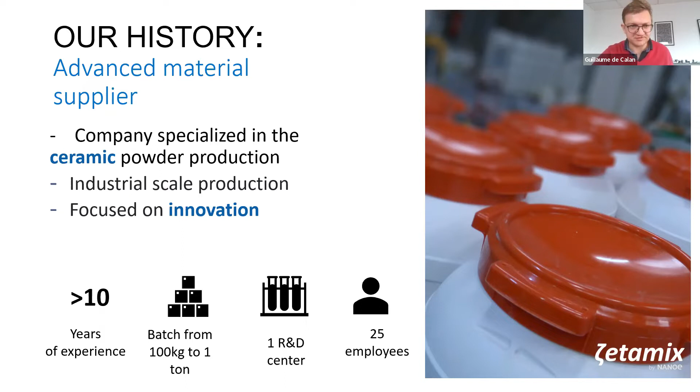That's it for the company. I just want to focus on one thing: we are a material company, not a printer manufacturer. That's where we come from when we develop materials for 3D printing. The company has been active for almost 15 years, and more recently in 2018 we started the line of ceramic filament with the objective to really make ceramic and metal printing affordable and easy to use, so that we could democratize access to these materials. That's why we decided to go for FDM or FFF printing, because it allows for a low cost, easy to use technology, and we can still manage to have high performance material with this technology.

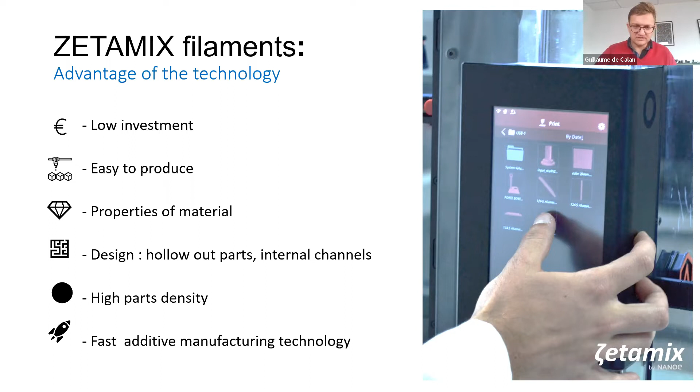So we are a material company again. What we offer is mainly materials, in the form of spools or filaments. Ceramic filaments first, so alumina and zirconia, black and white. The new one is silicon carbide, of course. And then we also have some steel filament with a stainless and a tool steel filament.

Through some partnerships with manufacturers of equipment, we also offer compatible equipment that allows printing these materials, mainly a printer and a sintering furnace, which are the two main steps. There's also a small debinding kit, because in some cases we need chemical debinding. But again, we offer this equipment because we know some customers want the full solution. We are a material company, so our focus is on developing new materials and improving them, not necessarily the printers.

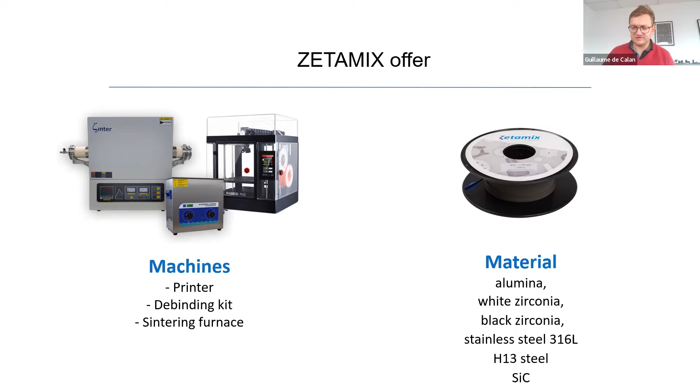So how does that work? Basically, all of our filaments are actually composites. That means you have a powder, which is the material we want to print. But in order to print it, we need binders, and that's what allows us to make the filament and then print it on any FFF FDM printer. The binder is actually a set of several binders, some acting as a backbone to hold the powder together, and others there for other functions. Usually one of them is soluble in a solvent and the other is not. Having several binders allows us to have all the necessary properties of the filament.

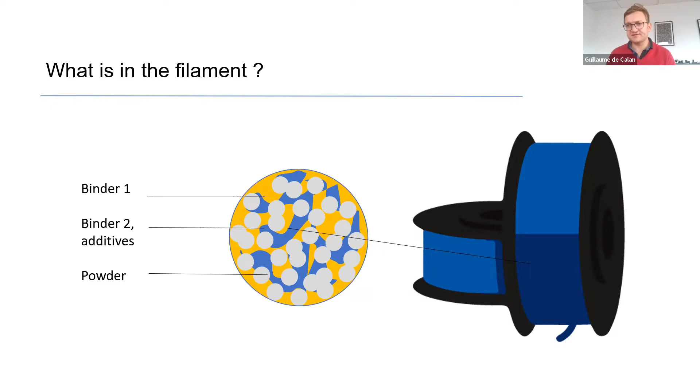Then the process is quite simple. For ceramics, we go through a 3-step process, which is well known for ceramic manufacturers and is also starting to be well known in 3D printing. We print using any FDM printer on the market, then we debind chemically, dipping the part in acetone in this case, and then we sinter the part under air. When I say sinter, it's actually thermal debinding, because there's still a bit of binder in the material, followed by sintering in a furnace.

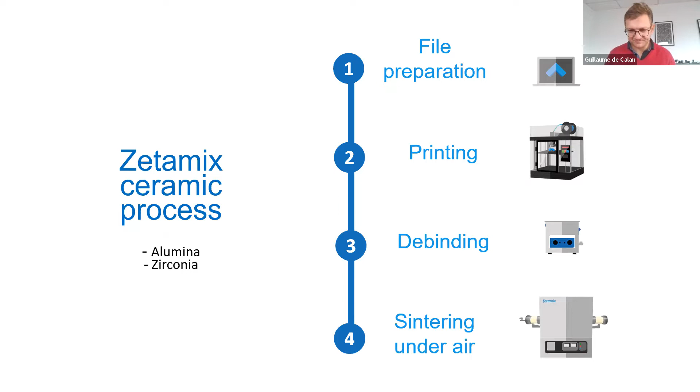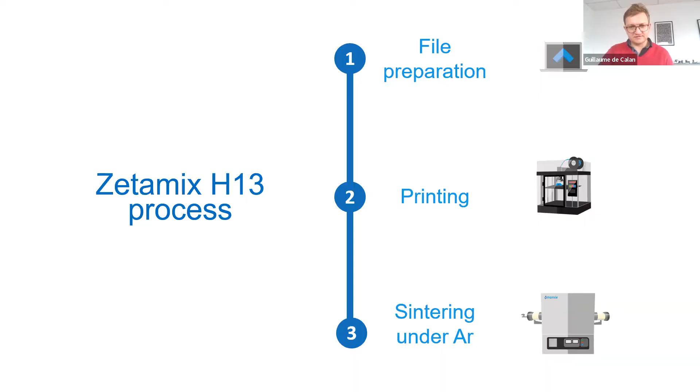If we talk about metal, it's slightly different. We don't have any chemical debinding; all the debinding is done in the furnace, which makes the process a bit simpler. You actually have 2 steps: you print, and then you put it in the furnace, where you'll have debinding and sintering. However, the sintering needs to be done under protective atmosphere because otherwise the metal will oxidize and you won't get a good material afterwards. So for H13, it's done under argon. We also have a stainless steel which needs hydrogen, but it's a bit more complex.

So now a few words about silicon carbide, what that material is, what the properties are, and why we want to print it. And then we'll dive into the technology.

So silicon carbide is really a high performance material. It's a material that you see in advanced applications a bit everywhere. You'll see it in aerospace, you'll see it in semiconductor, you'll see it in a lot of high performance applications because of these properties they have.

It's a very light material with a low density, very hard, one of the hardest materials available on Earth. It's high temperature resistant, so the range of temperature is quite wide because it depends on the atmosphere, but it's high temperature resistant. It does have some semiconductor properties. So in our case, clearly, it's not the kind of silicon carbide used for semiconductor, but however, it does mean that the material can conduct electricity. It can be used as a heating element, for instance. It's very corrosion resistant, it's wear resistant, and it has a very high thermal conductivity.

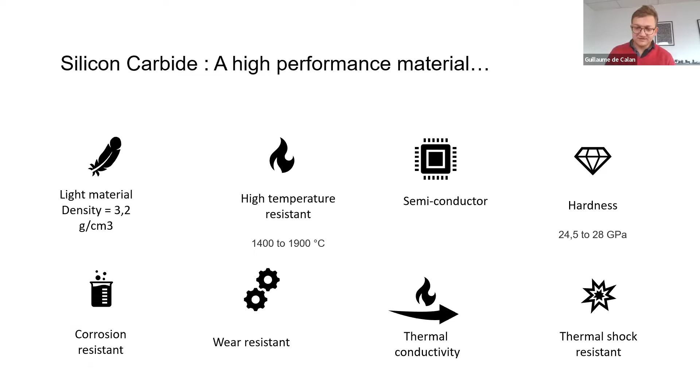You see that there's a lot of attractive properties here, which makes it a material that you could think should be everywhere. The reason why it's not everywhere is that it's an expensive material. It's expensive because the raw materials themselves are relatively expensive, they cost a lot of energy to produce. And then the sintering cycles are also extremely expensive because you need very high temperature and vacuum sintering. So the whole process line to make the material and to sinter the material is very energy intensive, and so it costs a lot. And at the moment, they particularly cost a lot because energy prices are soaring.

So it is the reason why silicon carbide is actually more like a last resort material. We print in silicon carbide when other materials won't be good enough. And typically, for us, the low-cost version of silicon carbide would be aluminum oxide. It's a bit similar in properties: it's lightweight, it's very hard, it's relatively chemical resistant. But in some cases, alumina won't be strong enough, won't be light enough, won't be corrosion resistant enough, and that's where we will go for silicon carbide.

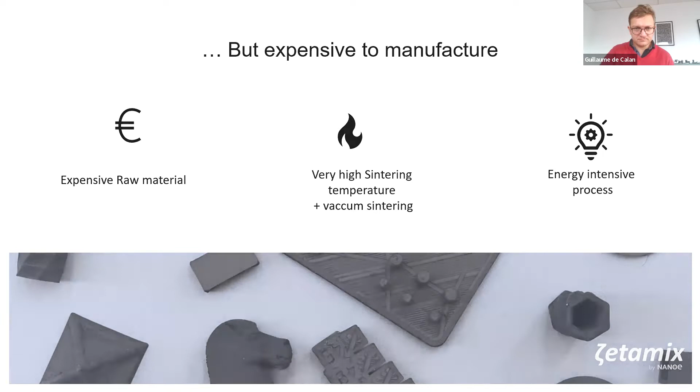A few words about silicon carbide and the different specificities, the different qualities of silicon carbide available, because that's something of importance in that case. Because of this very high temperature sintering, there's been a lot of work done into developing nuances of silicon carbide that can be sintered at lower temperature, and that means when we say silicon carbide, a lot of people may have a different definition of what is silicon carbide.

So you have everything from some porous material that are just sintered at low temperatures and will be used for catalysis or for filtration and doesn't actually need to be dense, up to the fully dense sintered silicon carbide, which is really a pure dense silicon carbide, usually sintered around 2,200 degrees Celsius.

And in between, there have been a few alternatives that have been developed. One of them is silicon infiltrated silicon carbide, also called reaction bonded silicon carbide. Basically, it's a porous SiC in which we will infiltrate some silicon metal to fill the gaps. It does make a very interesting material, but clearly it has a lower level of performance than a pure dense silicon carbide.

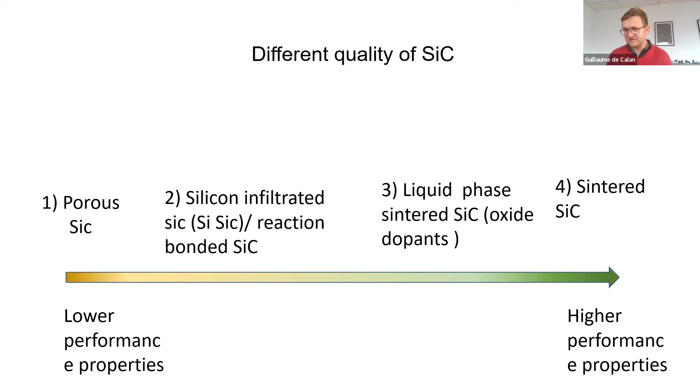So why do we want to print silicon carbide? There's a few obvious reasons here. The first one is it's a material that's very difficult to handle. Shaping the material is quite complex, and clearly if you want complex shapes, you really need to do them before sintering, because machining the material after sintering is literally horrible because it's so hard.

So it's very, very hard to machine after sintering, so you need to do everything before. And that means if you want very complex parts, it may be difficult with silicon carbide to obtain these. You will usually shape silicon carbide by pressing and green machining, and that will limit a bit the kind of geometries you can do with silicon carbide. So that's why we want to print it. We want to be able to optimize structures, to reduce weight.

We want to be able to use the advantage of additive flexibility of the technology, the ability to print one-off parts or a few parts at a time. All of this is very attractive, and it's not really available at the moment in silicon carbide. One reason is that printing a dense silicon carbide - precise, dense, and not a silicon infiltrated version - is at the moment not possible with any other technology. That's one of the reasons why we developed those filaments, because it unlocks applications where our customers don't have any technical solution at the moment.

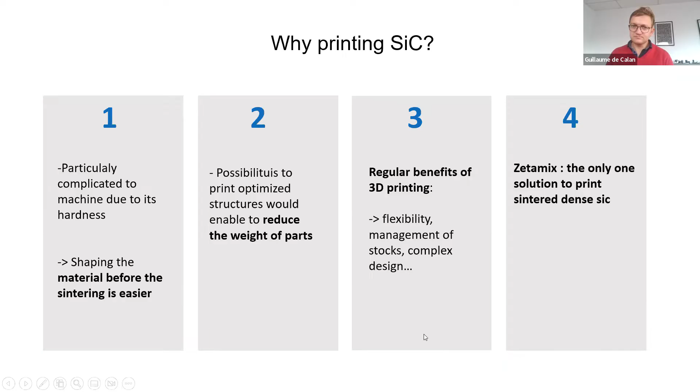So how does it work? Well, it's really very similar to what we do usually. You have file preparation, printing done with any FDM printer, debinding done in acetone. The one big difference is sintering, and that's the one limit of this material - you need to sinter it at 2200 degrees Celsius under vacuum or argon.

That is clearly one of the drawbacks of the material, because we don't offer a compatible furnace for this, which means you either have a furnace yourself, in which case you're part of the happy few, or you need access to a furnace. So we are considering at Nanoe launching a service so that you can sinter those parts with some of our partners, depending on how the demand is on that part. But that clearly is going to be the limit.

If you are interested in silicon carbide, the first question you should ask is, how am I going to sinter it? Very easy to print, very easy to debind - that's not the problem. The question is, how am I going to sinter the material afterwards?

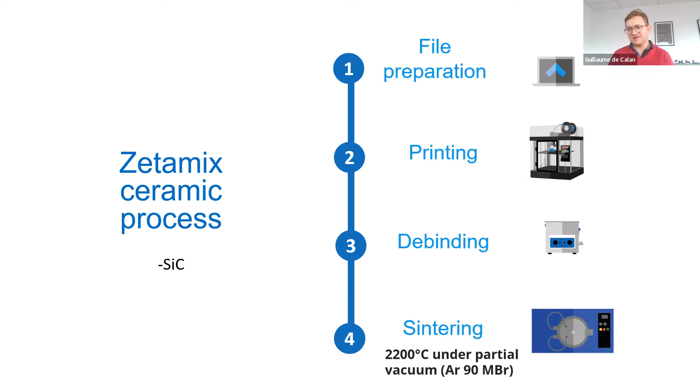So a few step-by-step explanation here. The file preparation is again very similar to what we have with any FDM printing. The only difference is we're going to use that step to also compensate for the shrinkage of the part. Typically we have a shrinkage around 20%, I can't remember exactly how much for silicon carbide - it's in the data sheet. And so we will oversize the part before printing.

The printing temperature in that case is relatively low, around 120 degrees Celsius. Because again, our binders are just temporary binders - they don't need any thermomechanical properties, they're just here to shape the part. So it's a quite low temperature printing.

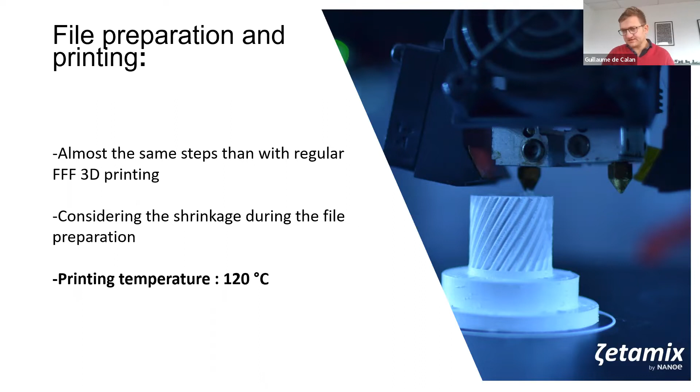So once we have done the file preparation, we have generated what we call G-code, which is lines of instruction for the printer. We will just print on any FFF printer, and then you debind. In that case, it's a two-step debinding process. The first step is to dip the part in acetone, which will remove approximately half of the binder. And then you will have a thermal debinding, which occurs in the furnace, and then sintering.

Usually, the kind of sintering equipment you need for silicon carbide are high temperature vacuum furnaces, and you usually don't want to do the debinding in that furnace. So we actually generally use two different furnaces. We use one for debinding under argon - typically we could use one of our tubular furnaces for that - and then we use the high temperature vacuum furnace only for sintering.

Here on these small examples of the part at the different process steps, you can understand why the shrinkage is occurring. Basically, if you want to densify the material, the grains have to coalesce together. The powder has to bridge the gap and fill the porosity, and that's why you are going to have that shrinkage of approximately 20%.

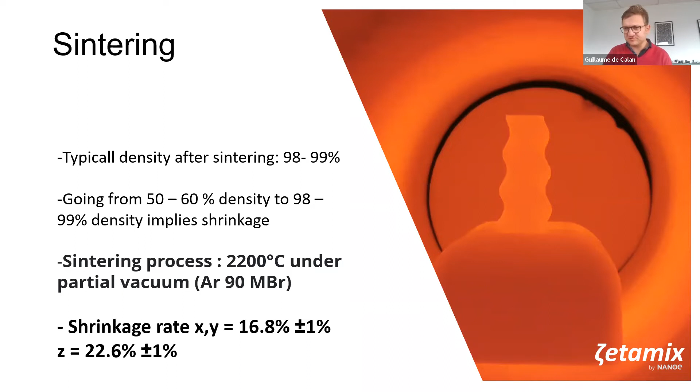So that's the sintering condition, and here you have the shrinkage. You can see there's quite a difference between X, Y, and Z, which happens with some other filaments - it really depends on the material, but here the difference is quite significant. And we reach densities up to more than 98%. 99 would be really high for silicon carbide, but 98% is what we can achieve with this material.

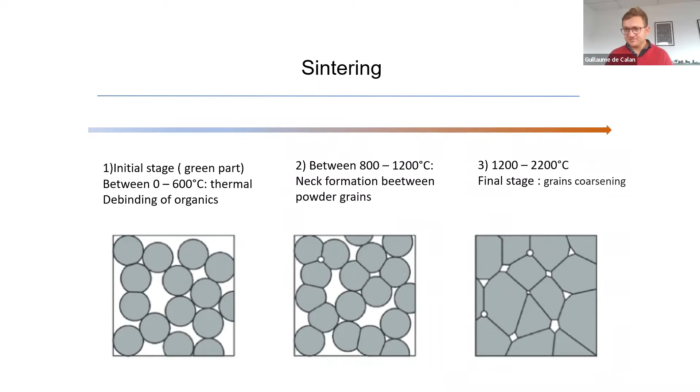So that's just a small illustration of what happens during sintering. We try to insist on this because we know that for some people, sintering is not something you come across very regularly, and that idea of densifying a material without melting can be a bit troubling at first. Well, this is really how you make any ceramic in the world anyway, so that's not new to ceramic manufacturers, but may be a bit newer if you come from a different background.

So I know that we've covered a bit how we can print and sinter this material. What kind of application do we have in mind? Why did we develop that material? Well, we developed it because we had a few OEMs who were really asking for this, and these OEMs are in a few fields that I'm going to talk briefly about. Of course, we're also looking for new applications, other opportunities with this material. So this is not an exhaustive list, it's just what we have identified so far.

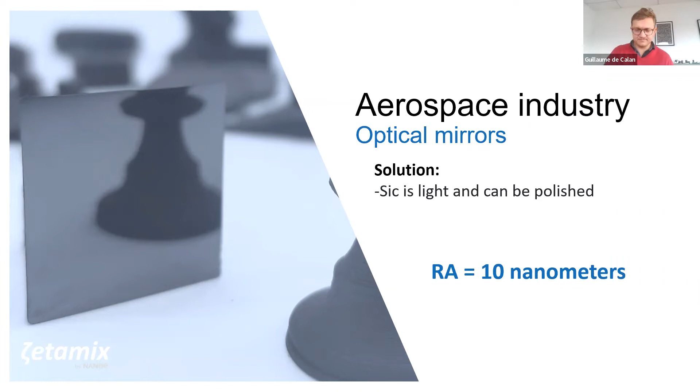Of course, we try to find other applications. Second one is in defense. Silicon carbide is used as an armor material. It's also used on ballistic, other ballistic applications because it's a very light material and it's very hard. And that's basically what you're looking for. You need a lightweight and hard material.

It's already used with standard shaping process. And of course, we don't aim here to replace those standard shaping processes, but you may need some complex shapes from time to time that do need to have these properties, whether it's ballistic protection or other ballistic applications. In that case, 3D printing could really make sense in that it will allow you to make these complex shapes in the volumes you need, and really with the same mechanical properties as what you have with a normal silicon carbide, especially with the same hardness.

We have a few applications in energy and especially in nuclear power. It could go in other directions, I'm sure, but nuclear power is a place where silicon carbide has really a sweet spot because it has high temperature resistance, good thermal conduction, and corrosion resistance, and that's a set of properties you don't have with a lot of materials. So that makes a few obvious applications, one of them being heat exchangers. I didn't mention that it's also a material that withstands reasonably well radiation, and of course in nuclear that's important.

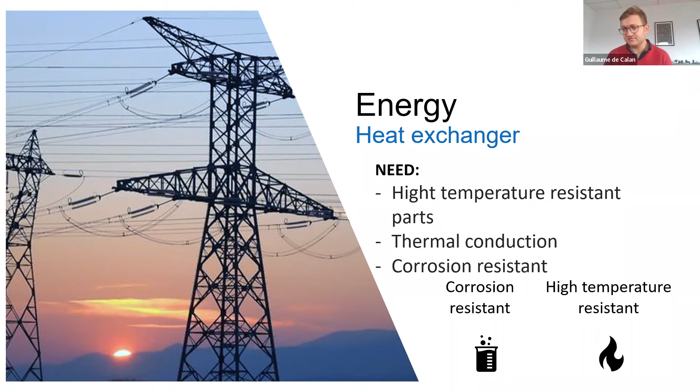And here we can understand the interest of using 3D printing. Typically, if you want to do an efficient heat exchanger, 3D printing will really beat any other process. And here you have an example of the kind of structure you could use in a heat exchanger, this being printed in this case with our silicon carbide.

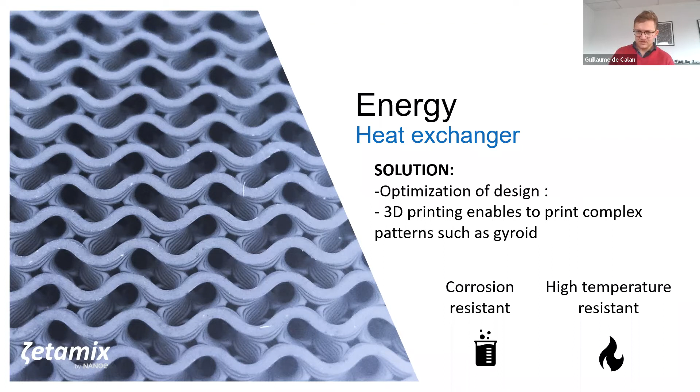Well, that's it. That's the few examples of application we had. The product is very new, so we're still looking for new applications, and that's also why we're doing this webinar. Maybe some of you have ideas of applications that could make sense, and you're more than welcome to ask your questions, ideally in the Q&A section if possible. Ask your questions and I'll try to answer them to the best of my abilities. Thank you very much, we'll switch to the questions. I have one for the moment.

So the question about surface roughness. How's the surface roughness in terms of optical mirrors? It should be less than microns.

So that is correct, I think I answered it later on, but you need extremely low surface roughness. The material itself needs to be in the range of 5 to 10 nanometers in surface roughness, which is really already quite amazing. And then the rest is usually done by applying what we call

optical layers. So you actually apply a coating on top of the material. Material is here as a backbone, but you still have an optical layer on top of it to get really to the nanometer range or less in terms of surface finish.

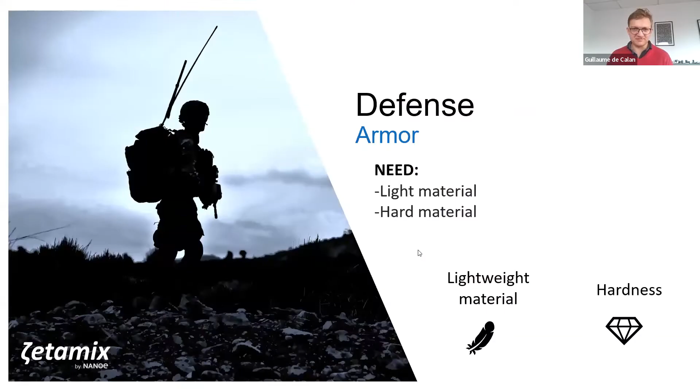So you may say, okay, we understand how that works. It's still a very important step, because by doing this debinding, we are already removing some significant part of the binder, and also we are already creating some porosity in the part that will help with the thermal debinding. And then the last stage is thermal debinding.

So what happens is you're basically burning the binder away very slowly, because if you go too fast, you clearly are going to destroy your part. So you need to debind extremely slowly so that you don't damage your part.

And once you have done the thermal debinding, at that stage, the part is extremely fragile. So the particles are just holding together by mere contact forces. So if you just manipulate the part, you will break it.

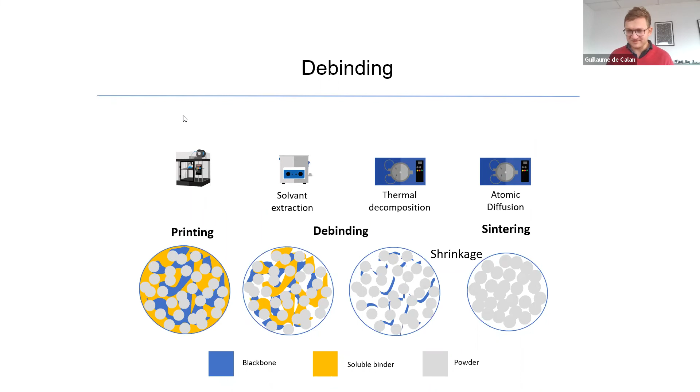So what is the density of the printed filament? That's a good question. I must say I don't have the exact value on top of my head, but I would say something like 2-point-something, because the density of silicon carbide is 3, and you have a mixture of silicon carbide and the binder, so it's 2-point-something. It's certainly probably in the datasheet if you go on the website, I think so.

So you mentioned only pure sintered SiC, if I'm right—how about liquid phase and nitride bonded or SiSiC? I did try to mention some of these, saying they exist and they're clearly interesting options. In our case, we decided to focus on the dense and pure sintered silicon carbide. I think liquid phase is very interesting. Silicon infiltrated SiC is also a great material, but if you go for silicon infiltrated SiC, there are other options on the market—you can print it with binder jetting, and you'll have a porous silicon carbide, and then you infiltrate it. So we felt that with our technology, we were bringing something more unique if we were doing the sintered SiC.

So, absorption of antibiotics on silicon carbide—I must say I don't know. I don't have a lot of experience of silicon carbide being used in medical applications. I would rather go for alumina or zirconia, which are materials extensively used in the medical industry for implanted devices. I'd say alumina or zirconia would be safer choices. We haven't experimented at all with antibiotic absorption, but I know there are a few implants on the market—I'm thinking of an alumina sternum implant developed by a French company called iCeram, where I know they have absorbed some antibiotic into an alumina implant. So I'd say it's probably possible, but a bit far from our field here. Of course, one of the interests of additive manufacturing is you could print porosity, and then use those porosities as small reservoirs for antibiotics.